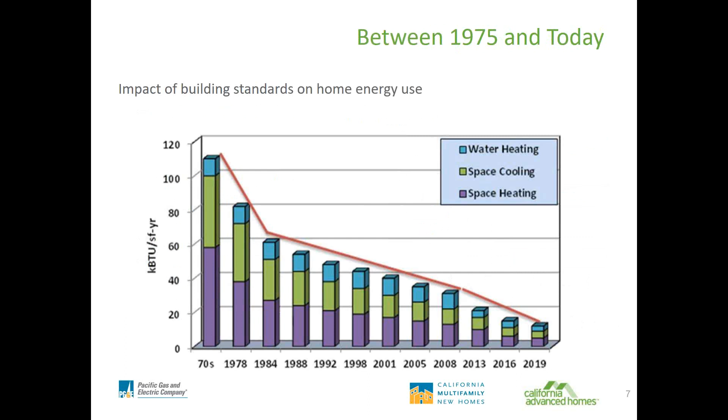But the 2019 standard goals continue to push this forward and push for more energy efficiency. So that brings us to the 2019 standard goals. There are 5 goals listed here. I'm going to go ahead and read through them real quick.

The first goal is increasing building efficiency cost effectively. Second, contribute to the state's greenhouse gas reduction goals. Third, substantially reduce the home's impact on the grid through efficiency and photovoltaics. Fourth, promote grid harmonization, self-utilization, and PV generation. And the final goal is to provide independent compliance paths for both mixed fuel and all electric homes.

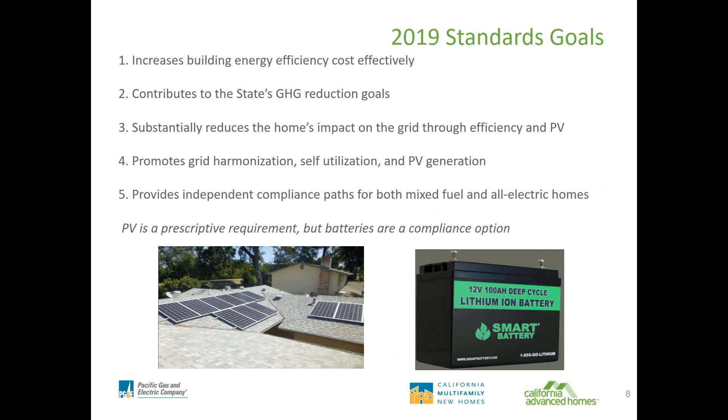This 5th goal is a significant development in the 2019 code, where we have 2 different baselines, one for mixed fuel, including natural gas and propane, and then all electric homes. Another notable point is that PV is now a prescriptive requirement, but batteries can be used as a compliance option. We'll discuss this more later about demand response possibilities that give better compliance.

So we're moving right along here, and we're going to go into the 2019 Energy Code. The California Advanced Homes Program and the California Multifamily New Homes Program is in the 2018 program year, but when the 2019 code takes effect January 1st, 2020, we will have a new launch detailing updated program requirements in relation to the 2019 code.

In CAHP, we've seen that QII typically increases compliance anywhere from about 6 to 13% in a 2016 code home. Reaching code will now require several strategies or advanced assemblies to go ahead and hit those same margins that we're seeing in the past code cycle.

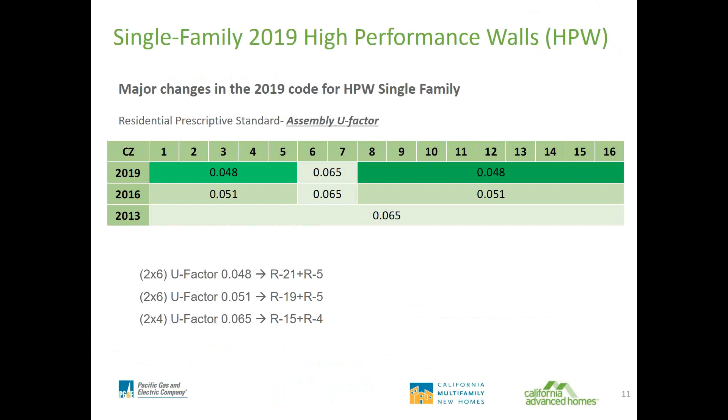Here we have the U factors of wood framed walls, from the JA reference appendices 4.3 walls in the code. For these wood frame walls, these highlighted values show the 0.065 U factor, which is the requirement for climate zone 6 and 7 in both the 2016 and 2019 code.

Reading this graphic, you can see that the 0.065 U factor is achieved through R15 cavity insulation. Working across to the right, you have the 2x4 nominal framing size, and further right, R4. For the 0.051 U factor, the 2016 code uses R19 cavity insulation and R5 exterior continuous insulation, now being bumped to 0.048.

That brings us to the third highlighted value in the table, where the 2016 code requires R19 and R5, now being bumped in the 2019 code to R21 and R5.

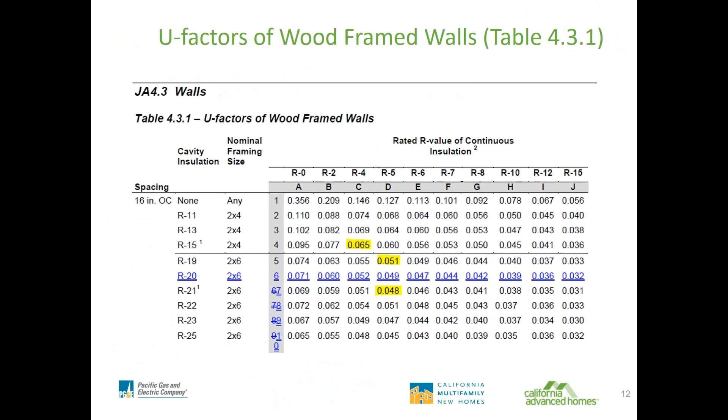Previous code cycles have not distinguished between single family and low-rise multifamily walls, but the 2019 code does. This is the first time we've seen this.

For multifamily, the 2019 high-performance walls show no changes from the 2016 code. So the 2016 code remains the same for low-rise multifamily, but we are seeing a divergence between single family and multifamily. In this table, the U factors are the same between 2016 and 2019, just denoted by different colors.

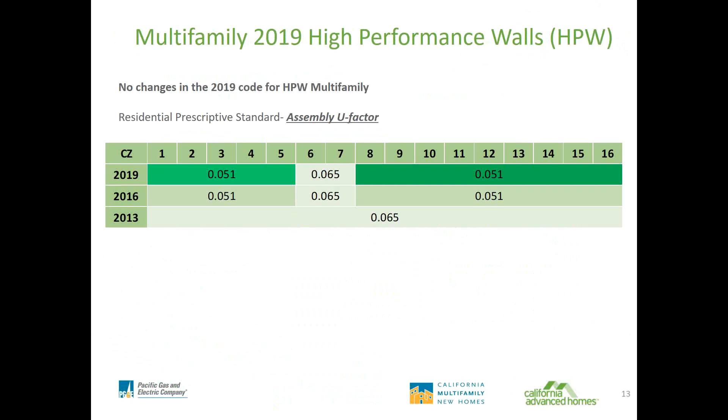For single family 2019 high performance attics, there are 3 options. These 3 options were originally noted in the 2016 code, and there have been changes.

For the first option, option A, it is now a reserved option for the high performance attic. So instead of having a prescriptive requirement for option A, users will be directed to use the performance path for above deck insulation.

For option B, it's the high performance attic. There is a significant change with the first line item: below roof deck R19 for climate zone 4 and 8 through 16. This is significant because the R value for this assembly is with airspace. This is a change from the 2016 code, where option B required R13 with airspace and R18 without airspace. In the 2019 code, it's now R19 with airspace.

Ceiling insulation is R30 or R38, climate zone specific. Radiant barrier is required in climate zone 2, 3, 5, 6, and 7. Duct insulation is either R6 or R8, also climate zone specific.

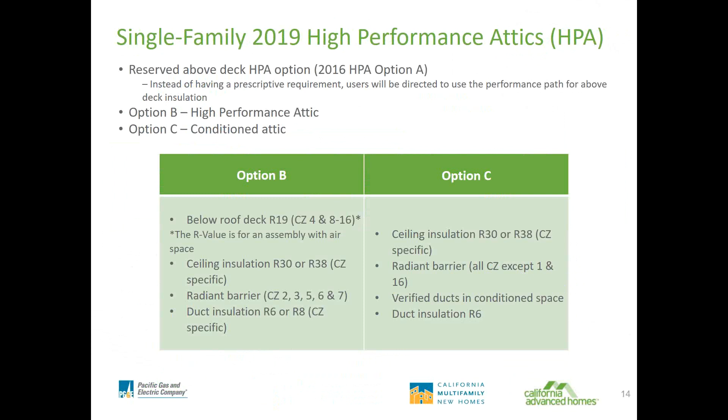We just got a question in, Nolan. Can you recap the target energy design rating? I know we'll be going over this in greater detail in the following slides, but maybe just briefly now, and then we can talk about it in detail once we get there.

Yes, absolutely. Later on we have a couple slides devoted specifically to breaking down the target energy design rating. There are a couple elements to talk about, but for the EDR, that's essentially a whole house metric that pulls in both regulated and non-regulated loads to rate the performance of the house. I hope that satisfies your question for now, and if later on I didn't completely satisfy that, I'm happy to revisit it and dive a little deeper.

Great, thank you. Cool.

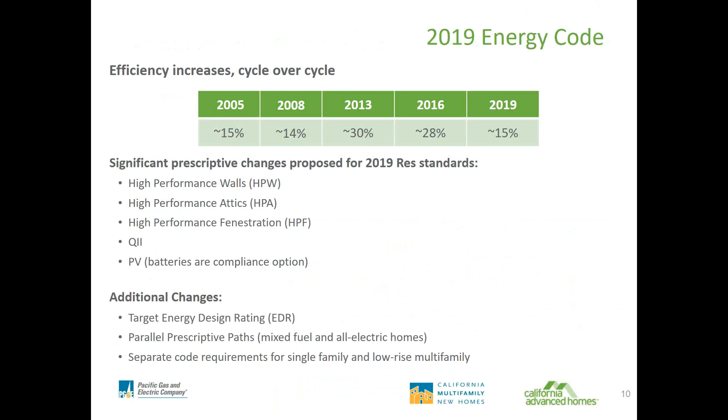Okay, so I was just on the single family 2019 high performance attics. I'm going to go ahead and move to the multifamily 2019 high performance attics.

For the most part, this is the same as single family, although there is one change, and that's in option B. But just to recap, option A moved from just a prescriptive path to a performance path for the above deck insulation. Option B, the major change here is the below roof deck is R13 for climate zone 10 and 16, and again, this is with the airspace.

So the R19 is what was stated in the single family. And now here for multifamily, we have the R13 for climate zone 10 and 16, and then R19 for the remaining climate zones. And then the other requirements, ceiling insulation, R30 and R38, climate zone specific, radiant barrier, only in climate zone 2, 3, 5, 6, and 7. And again, the duct insulation, R6 or R8, and that is climate zone specific.

And option C remains unchanged, conditioned attic.

Pearl, do we have another question? We do. So one of our participants, they want to know if does the below roof deck option, which is

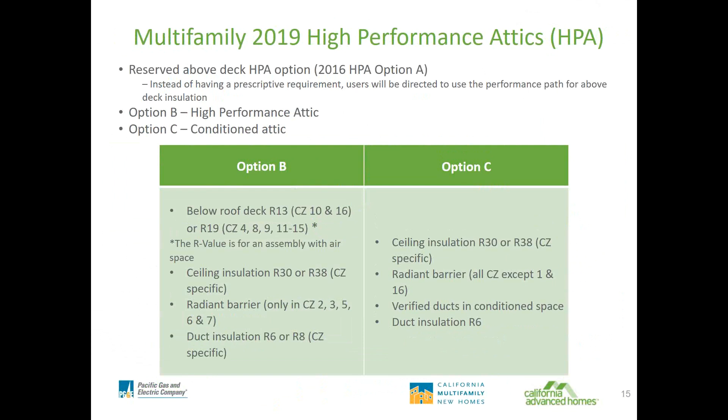Okay, moving along to 2019 high performance fenestration. The 2016 code fenestration prescriptive is a maximum of 0.32 U factor for all the climate zones. Here in this image, you can see that the maximum U factor for the 2019 code has been bumped down. So it went from 0.32 U factor in 2016 to a 0.3 U factor in 2019. And again, this is for all 16 climate zones.

For the 2016 code, the SHGC, so the solar heat gain coefficient, is not required in climate zone 1, 3, and 5. These are heating dominated climates where they are typically using their HVAC for heating, and therefore they want to potentially let in more heat into the building to go ahead and offset that load.

And the 2016 code requires maximum SHGC of 0.25 in the remaining climate zones, so 2, 4, 6 through 16. And these remaining climate zones are cooling dominated climates. And therefore, we want to limit the amount of heat gained in these houses as to not affect the cooling load and increase overall cooling load.

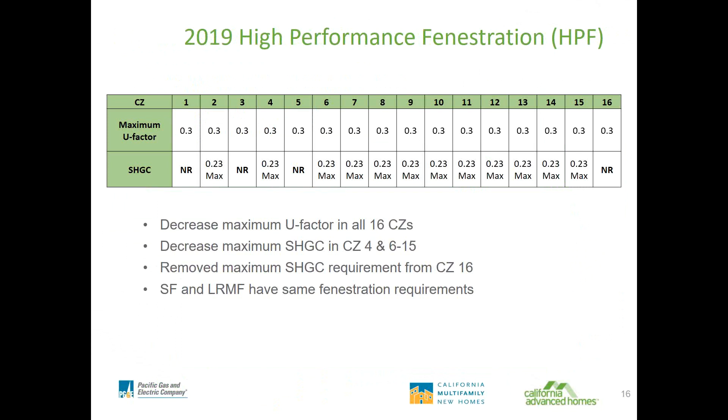So for the another prescriptive change is 2019 Quality Insulation Installation, QII. And this is a significant bump. So I mentioned earlier that in CAHP we've seen QII typically increasing compliance from 6 to 13%, anywhere between 6 and 13% in a 2016 code home. And this translates roughly to 1 or 2 delta EDR points compared to a 2016 home not taking credit for QII. So QII is a significant change in the 2019 code.

And the addition of this prescriptive requirement will not allow projects to have the same performance flexibility as we've seen in past code cycles. I've seen 2016 code projects installing efficient equipment and QII with some relatively good above code compliance margins. And I expect that with the 2019 code QII prescriptive requirement, that projects will have to utilize more efficiency measures and construction assemblies to reach similar compliance margins.

So the QII is now prescriptive for all 16 climate zones. And that second bullet point is a little bit of code language that's pulled over. I want to take a minute and just let everybody know in the audience that the content in this slide is from the code language, but some of the language has been slightly adapted for the purposes of this webinar. So please refer to the code for a complete list of all the requirements and all the details.

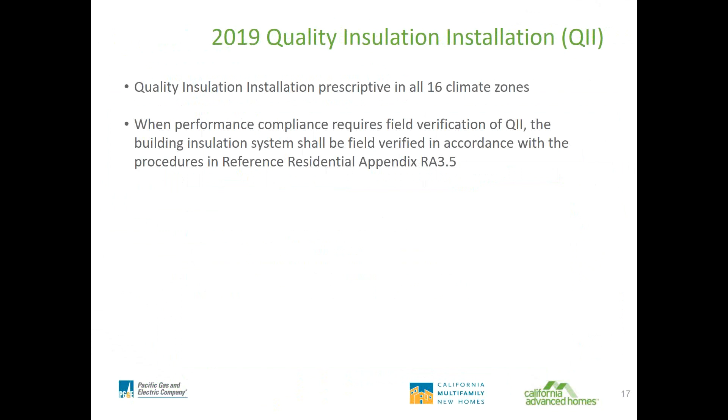Okay, great. Thanks again for your questions. So I'm going to go ahead and move forward to the single family 2019 domestic hot water systems.

For the 2016 code, just for a little bit of comparison, the proposed water heating systems were compared against the gas instantaneous water heater. As you can see, it's just option 1 that had no changes in the code. The 2019 code offers separate gas and electric baselines for water heating, and I'll go ahead and get into the electric baselines on the next slide.

So there are 5 options. The first 3, I couldn't fit them all in one slide, so the first 3 are for natural gas or propane, and the following 4 and 5 are for electric. The prescriptive baseline for the electric water heating is a heat pump water heater, and I have a slide detailing that definition in subsequent slides.

Again, please note that the language has been simplified. The system serving individual dwelling units can be one of the following. The first option is 1 or more gas or propane instantaneous water heaters with an input of 200,000 BTU per hour or less and no storage tank. Second option is a single gas or propane storage type water heater with an input of 75,000 BTU per hour or less and a rated volume of equal to or less than 55 gallons, plus one of the following.

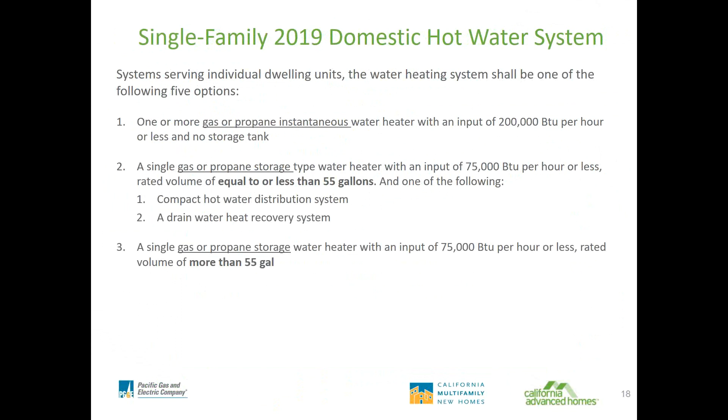Okay, so we covered single family. We're going to move over into multifamily. So multifamily 2019 domestic hot water systems, these are for systems serving multiple dwelling units. The central water heating system shall include a gas or propane water heating system and recirculation loop system that meets the requirements of section 110.3C2 and 110.3C5. This includes 2 or more separate recirculation loops serving separate dwelling units and is capable of automatically controlling the recirc pump based on supply and return temp.

There is an exception here: for multifamily buildings with 8 or fewer units, they can use a single recirculation loop.

In addition to the first 2 requirements, the multifamily hot water system must have a solar water heating system meeting criteria of reference residential appendix RA4 with a minimum solar savings fraction of either A or B. A is a minimum solar savings fraction of 0.20 in climate zones 1 through 9, or 0.35 in climate zones 10 through 16. Option B is a minimum solar savings fraction of 0.15 in climate zones 1 through 9, or 0.30 in climate zones 10 through 16. In addition, a drain water heat recovery system that is field verified as specified.

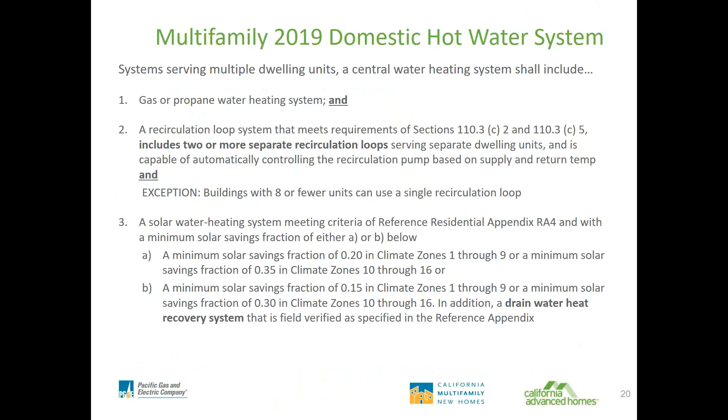Okay, wonderful. So the next slide is for electric standard water heating. This is pulled off of the Quick Start Guide from the 2019 CBECC-Res software. When there is an electric or heat pump water heater in the proposed building, the standard design is now a generic heat pump water heater with 2.0 UEF, uniform energy factor, basic compact distribution, and shower drain heat recovery dependent on the climate zone. Please note that this electric water heating baseline does have a heat pump water heater with the compact distribution and shower drain heat recovery.

Do we have any other comments? No? None so far. Wonderful.

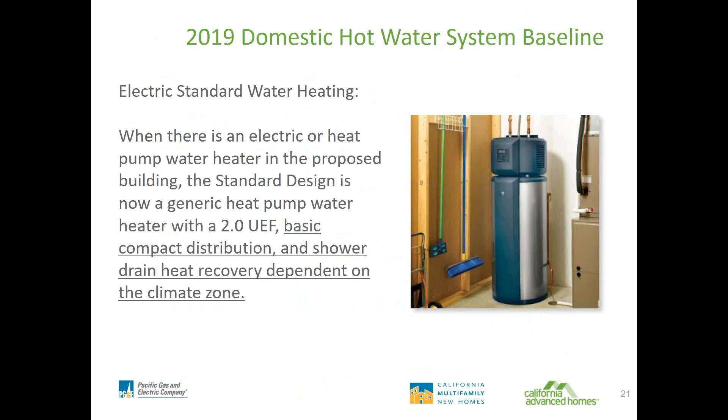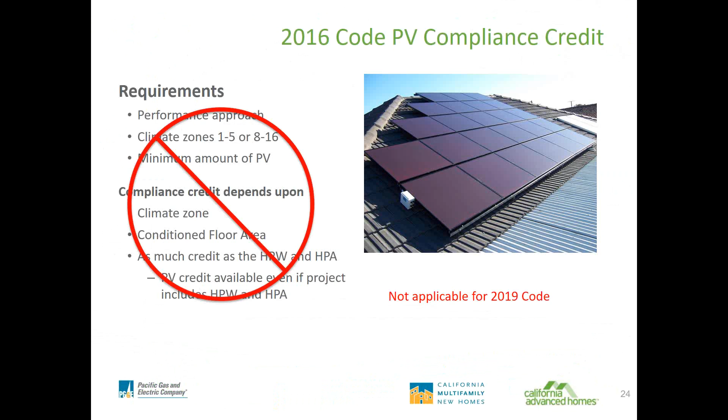So we're going to keep moving into the 2019 code and photovoltaics, PV. Right now in the 2016 code there is a PV compliance credit through the performance approach, in climate zones 1 through 5 or 8 through 16, with a minimum amount of PV you can qualify. With the compliance credit, it depends on climate zone and conditioned floor area, and you could potentially get as much credit as high-performance walls and high-performance attics—even if you are doing those two construction assemblies. But in the 2019 code, it is not applicable. The 2016 code PV compliance credit is no longer applicable to the 2019 code.

So here comes the sun. The 2019 code is proposed to have prescriptive PV systems—that's why you can't get a credit for it, because it's now prescriptive. That prescriptive PV system is sized to offset the annual kilowatt hours of a mixed fuel home. There are several exceptions, six of them for this prescriptive requirement, and I'll list those in a subsequent slide. Something to keep in mind is that community solar can also be used to satisfy this prescriptive requirement. Houses can be served by commission-approved community solar projects that provide equivalent benefits, and the code defines this as energy savings, bill reductions, and durability to the home as on-site PV.

We have a question on something covered in slide 22. Elizabeth wants to know if the overall compliance credit shown on slide 22 includes all other energy features of the project as well. I'm not entirely sure because I adapted this from a different presentation, but I believe it does, because when you run the model it takes all of that into account for the overall compliance credit. So based on how it's presented here, I would say yes, but I did not author that, so I'm not 100% sure of what went behind it. Great.

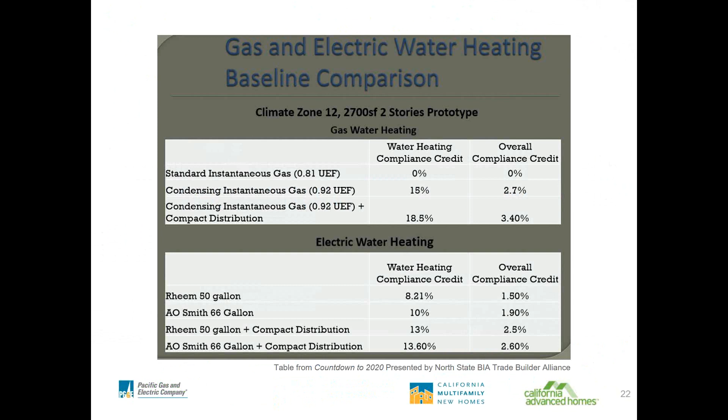For the 2019 code prescriptive requirement, all low-rise residential buildings shall have a PV system with annual electric output equal to the dwelling unit's annual electric usage, as determined by the equation below. All-electric homes are proposed to have the same PV array as a mixed fuel home with similar features. This is done because requiring a much larger PV system on an all-electric home to displace larger annual kilowatt hours might disincentivize the all-electric home approach. Having those larger annual kilowatt hours is a challenge, and that makes grid harmonization strategies more important—grid harmonization goes back to demand response opportunities.

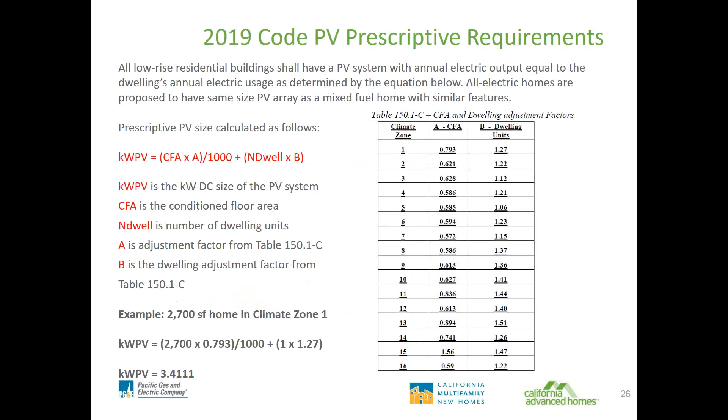The first one is shading from hills, trees, and adjacent structures. There are also exceptions for buildings with 3 habitable stories at a smaller roof size, or for any dwelling unit plans that were previously approved by planning departments prior to January 1st, 2020. So there are several different exceptions. Just keep in mind that community solar can be used to satisfy the prescriptive PV requirement.

A noteworthy exception is exception number 6, which allows for a 25% reduction in the PV size if the PV system is installed in conjunction with a 7.5 kilowatt hour battery storage system. We'll discuss the prescriptive PV requirements and battery storage shortly, and walk through a modeling example.

So here comes the EDR. I know we mentioned this earlier, but here we can dive a little deeper into it. For the energy design rating, it's a home energy index that uses time-dependent valuation of energy, or TDV, including all end uses in the home to provide a whole house energy efficiency metric.

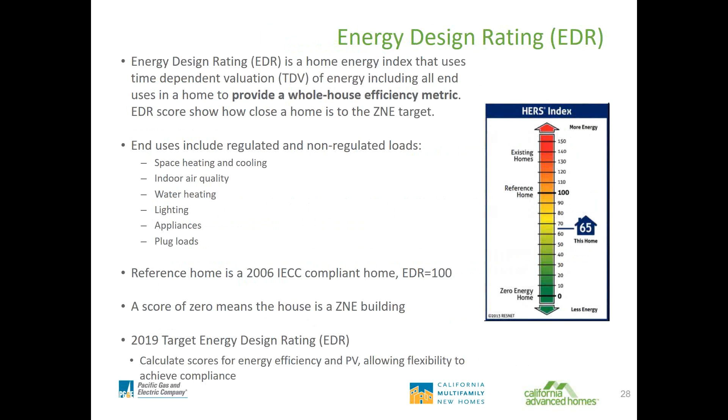In addition, it allows for flexibility to achieve compliance. So the EDR is a metric to evaluate code compliance rather than a compliance percentage. In the 2019 code, there are 2 target EDRs, one for efficiency only and another for PV generation. This provides credit for demand response and flexibility, storage, EV integration, and grid harmonization.

For a building to comply with 2019 code standards, 2 criteria are required. First, the project meets the proposed efficiency EDR, which must be equal to or smaller than the standard design efficiency EDR. Secondly, the proposed final EDR must be equal to or less than the final standard design EDR target. So the efficiency and final must be equal to or less than the target.

The software allows for significant final EDR credit for demand flexibility measures. This goes into the PV EDR, and these strategies can be independent from the efficiency EDR and can be used to achieve lower EDR scores.

The software has a nifty little tool, the target EDR tool, that identifies the PV EDR needed to reach a specific final target EDR. Essentially, if you have plans and already know your energy efficiency EDR and you're trying to reach a final EDR target, you can use the software to calculate what the PV EDR needs to be for your project to reach that final EDR you desire.

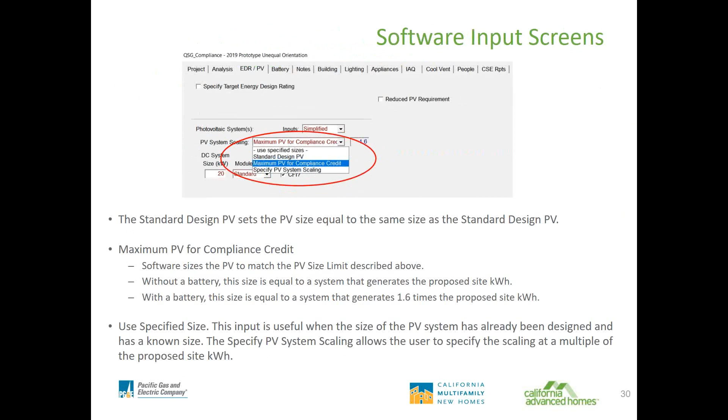I did not see an explicit explanation of this, but to take an educated guess, I believe it's because you're generating on-site energy, storing it on-site, and consuming it on-site because you have the battery storage, thus eliminating the inherent inefficiencies and transmission and distribution losses that the electricity takes from the power plant to get into your home for consumption.

So for battery size, the battery allows the size of the PV array to be reduced by 25% with the installation of a 7.5 kilowatt hour battery system, and there are 3 battery control options here. I was unable to take a screenshot with the drop down so you could see all of them, but I'll go ahead and read through what the different options are.

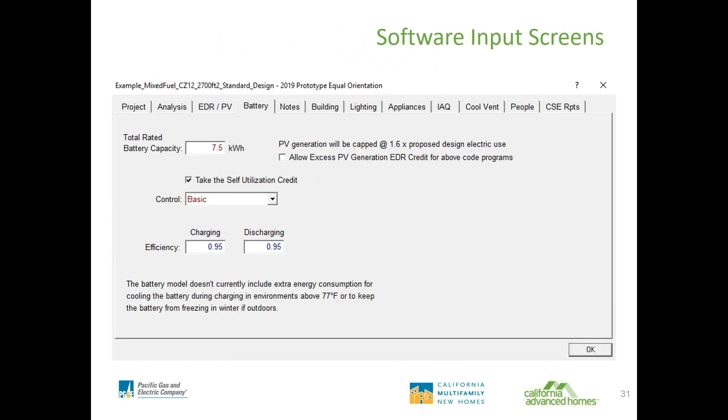For this particular project, the proposed efficiency is 39.6. The EDR of proposed PV is 23.0, yielding a final proposed EDR of 16.6. Here, the proposed efficiency and final EDR are less than the standard efficiency and standard final EDR, and thus the project qualifies and complies with the code.

If you notice, there's a plus flexibility for the EDR of the proposed PV, and that is referring to demand response capabilities. Yes, great, we have another question from Barbie.

She's asking if it's possible that a larger credit might be allowed for a larger battery system. She's saying the smallest capacity Powerwall 2 is 13.5 kWh, which would provide nearly double the storage capacity to support many homes. So does that add to the credit — do you get a larger credit for a larger battery system? They just specify 7.5 here.

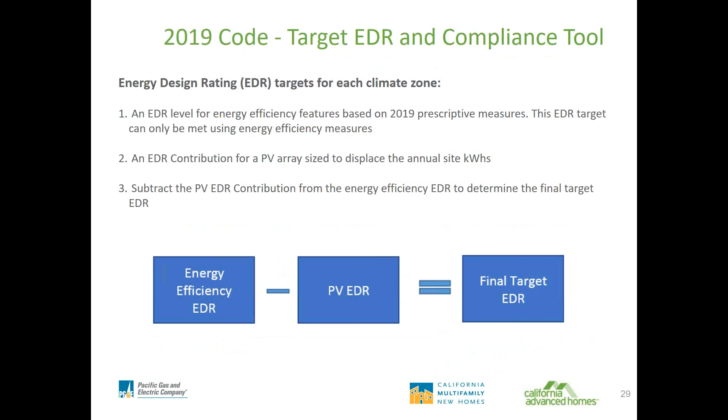I want to go back to this. I know that for the 7.5 it would, but there are, as I mentioned, constraints around net metering. So I would recommend checking with your utility to make sure that's acceptable. But yes.

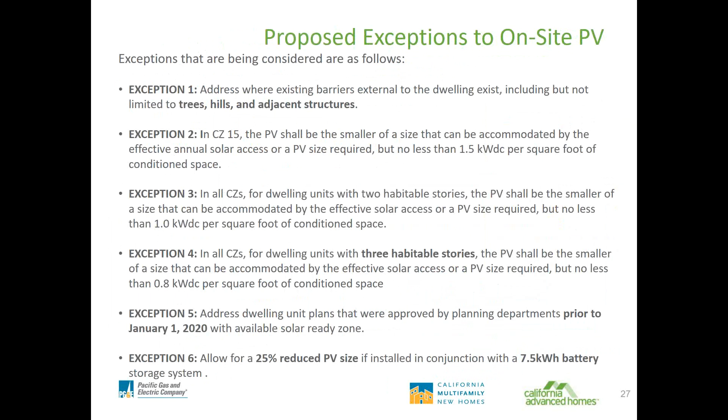Cool, any other questions? None at the moment. Wonderful, okay, I think that wraps it up for my end, and Pearl, I'll pass it back to you.

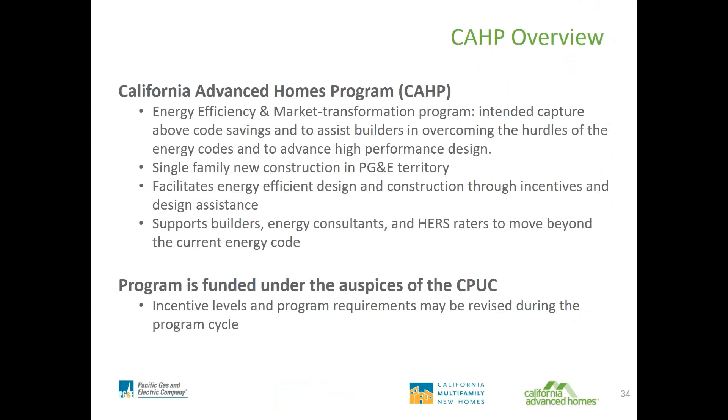Great, so recently we made some additions to the 2018 program. I thought it would be valuable to quickly go over the additional kickers. We primarily wanted to include it in the slide deck. I know most participants are familiar with the program, so I won't spend much time on that. Just an overview: CAHP is our single family homes program and CMFNH is multifamily.

The projects that come in through these programs need to be permitted to the 2016 Title 24 code. So we're still talking about the current code cycle, as opposed to the rest of our presentation, which was about the next code.

Just to go over the new cash kickers we added: we have a new QII kicker, which provides an additional $400 cash incentive for any project that takes that. We also have tiered incentives for single-family homes projects under CAHP for reduced building air leakage — a tighter envelope. Incentives start at $100 per lot and go up to $300 for the tightest home in our tiered approach, at 1 ACH50.

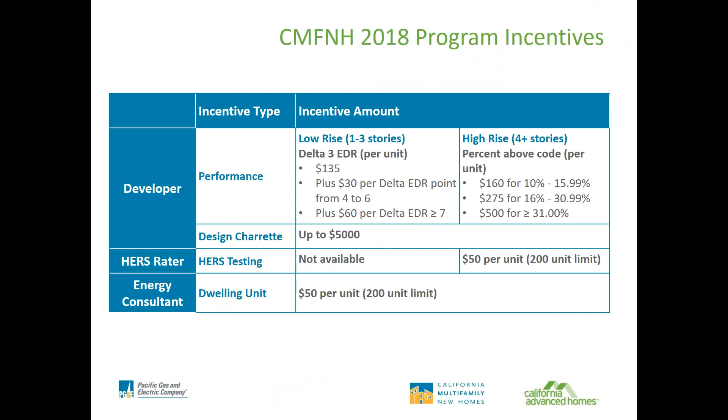For CMFNH, the project again needs to be permitted to 2016 Title 24 standards. We added the QII kicker to low-rise multifamily projects as well, so any project that does that would qualify for a $45 per unit incentive. The kicker tables are available in your slide deck.

I know I practically just rushed through them — we were just running out of time. But we wanted to make these available for any projects that would want to participate in the current code cycle.

We just got another comment about making Table 150.1 available for the 2019 code, and thank you for that. We will make it a point to add that to the slide deck email we send out to participants right after the webinar.